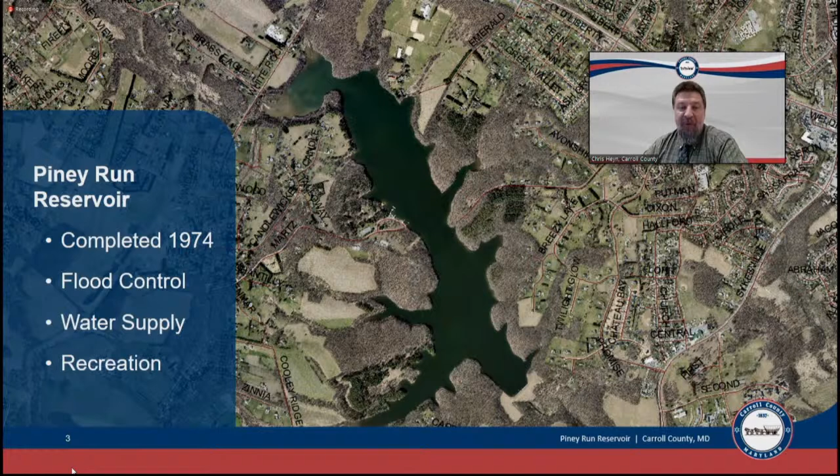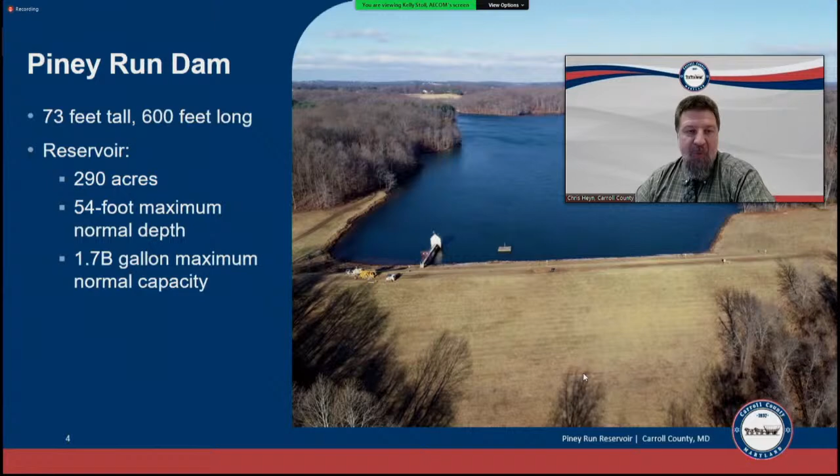So the reservoir itself is held back by Piney Run Dam. The dam is 73 feet tall and 600 feet long. It's the largest dam that is owned and operated by Carroll County. The reservoir behind it is approximately 290 acres of water, the maximum depth is 54 feet. I don't think you can really quite see it in the image, but there's a red buoy floating right next to the dam. That buoy is actually tethered to the lake drain, and that's the point of deepest water, where it's 54 feet deep. The overall capacity of the reservoir is about 1.7 billion gallons. Next slide, please.

So as we're talking about the dam and the reservoir, I wanted to talk about some of the key terminology so everybody is on the same page and knows exactly what it is that we're talking about. Obviously, the dam is the most important feature that we're talking about here. The picture in the upper left corner shows the dam looking along it with the reservoir off to the left. The permanent water level in the reservoir is maintained by the principal spillway, which is made up of a riser structure, a concrete structure pictured in the lower right corner. That concrete structure has openings on the side, and the elevation of those openings is what controls the water level in the reservoir. The water flows out through those openings, drops down to a pipe, a 3-foot diameter pipe that runs through the dam and out to Piney Run. So that's what we call the principal spillway.

Now on the left side of the screen, the auxiliary spillway, also sometimes referred to as the emergency spillway, is another way for water to exit the reservoir. We have stream flow constantly coming in. During a large storm event, the reservoir fills up more, and the principal spillway tries to control the amount of water going out. If the storm is greater than what the principal spillway can handle, water would go out the auxiliary spillway as a safety measure, allowing water to get around the dam without it going over the dam, which would be an issue.

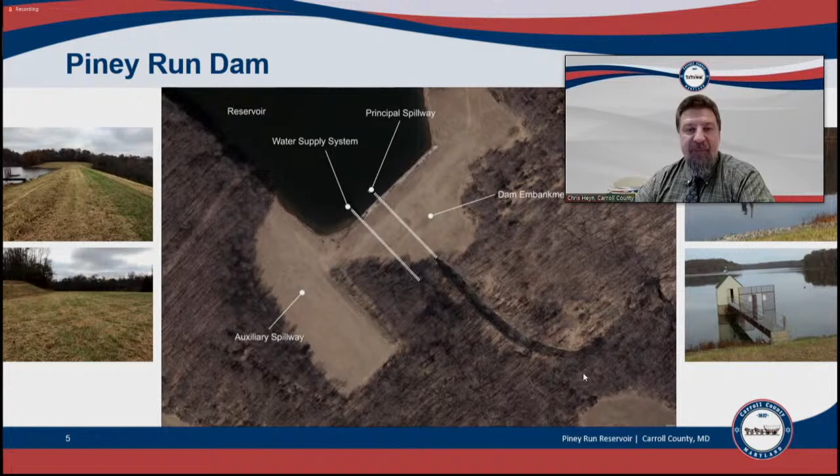This slide, just because I find it interesting, puts into reference the magnitude of the structures we're dealing with. The concrete structure on the right is from during construction, around 1973-74. The concrete structure in the foreground is the riser structure I talked about, and that's the top of it you see in the lower right. Water flows in at the top and drops down through the dam. The dam itself is not in this picture; it was constructed to the left of those concrete structures, and the reservoir is to the right. The structure in the background is the water supply structure.

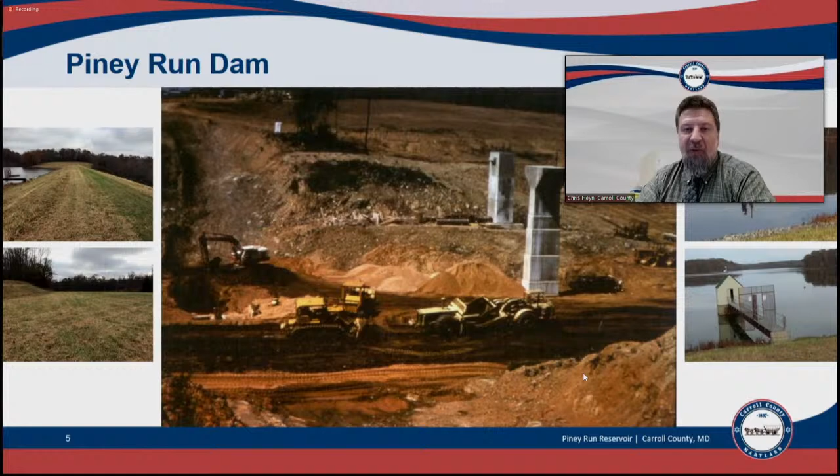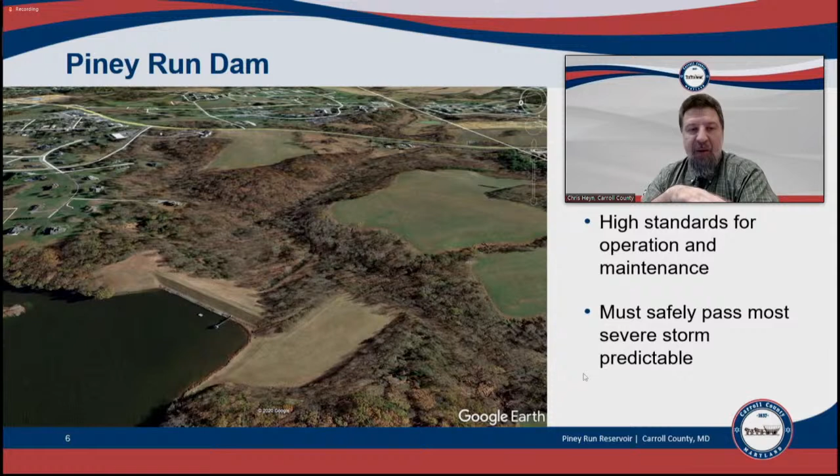Piney Run Dam is classified by MDE, Maryland Department of the Environment Dam Safety, as a high hazard dam. It's the only high hazard dam the county owns. The reason for this classification is that we have 54 feet of water stacked up behind the dam right now, and during a large storm that water level could rise all the way to the top of the dam or higher, meaning over 70 feet of water stacked up behind it.

If something catastrophic were to happen and the dam were to breach, releasing that wave of water, it would flow down the stream channel. In the background of the aerial photo you can see Maryland 32. That flood wave, starting off at over 70 feet tall, would still be 30 to 40 feet tall when it hits Maryland 32, which would be catastrophic. The flood wave would continue downstream, impacting over 240 properties and 40 other road crossings. So there is a real risk of catastrophic damage and loss of life if the dam were to fail.

To offset that risk, there are criteria we must follow. One is very high standards for operations and maintenance of the dam. The second is that the design of the dam and infrastructure must safely pass the most severe storm that's predictable.

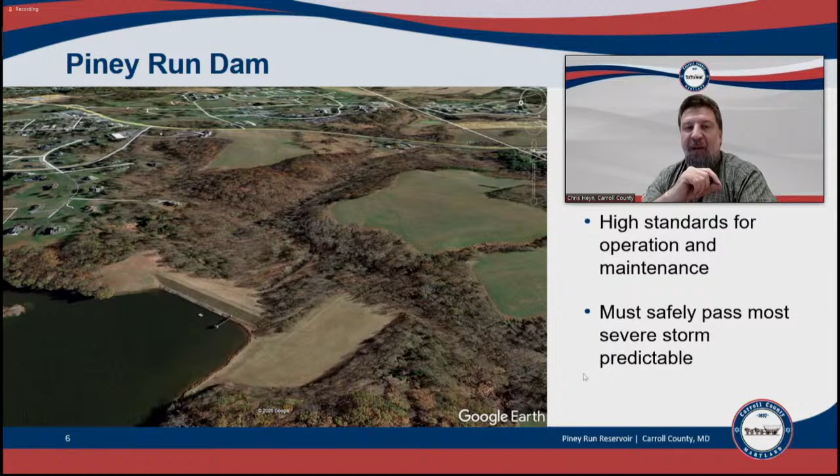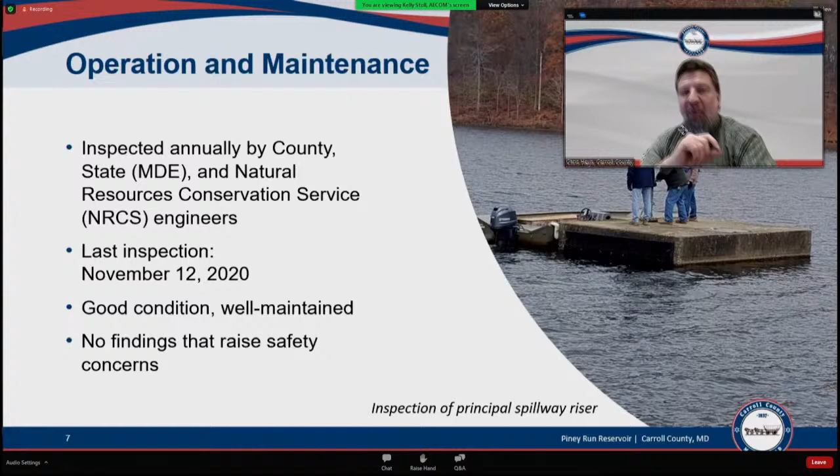One thing I want everyone listening to understand is that from an operation and maintenance perspective, there are no issues out at Piney Run Dam. We're not doing this project because of a structural or critical issue needing immediate attention. The dam is inspected every year by county staff, MDE state staff, and NRCS engineers to ensure it's in good condition and well maintained. We just performed our last inspection this past November and received the annual report from MDE with excellent marks across the board for maintenance and condition. This is not about addressing any deficiency in how the dam has been operated.

So the reason why we're doing this study is because of an MDE compliance question. One of the things we have to look at is whether the dam infrastructure and the spillway can safely pass that design storm, the worst possible imaginable storm. It's really a question of spillway capacity - is this spillway wide enough to handle the flow for that worst imaginable storm?

The other question relates to the erodibility of the spillway. If we have a storm large enough that water is going out that earthen spillway and it starts eroding, it could erode back and fail the dam and the reservoir.

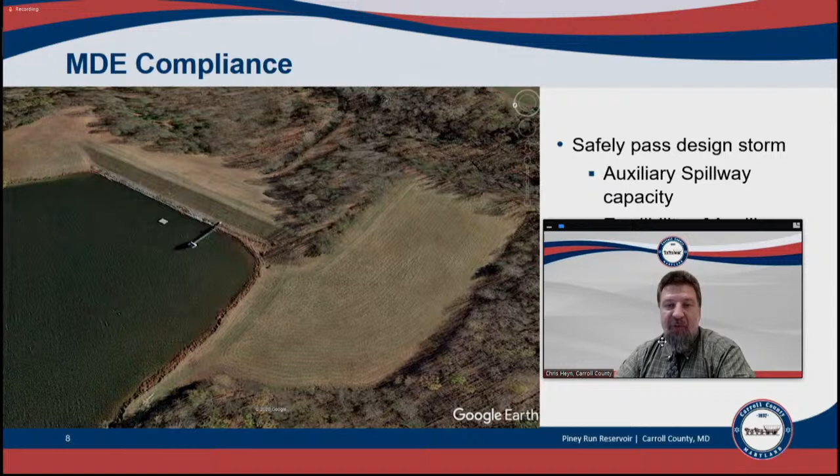MDE posed those two questions a couple of years ago, and they directed us to perform a study and determine if their concerns are valid or not. If they are valid, we're required to mitigate those issues by 2027. That was the impetus for all of this work.

So we hired AECOM, and their work is being funded out of a grant from NRCS, who originally constructed the dam. They've been working for the past just over a year on all of this analysis to determine whether those questions are valid, whether there are issues. Plus, they've done a comprehensive inspection of the dam, et cetera.

But I'm going to turn it over to Jeff Blass from AECOM, and he's going to talk about the work that they've done and the results that they've come up with.

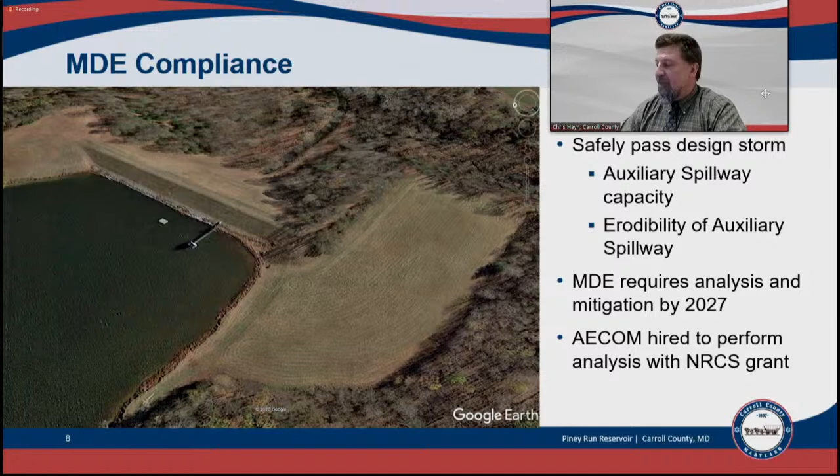I'm going to talk a little bit first about the work we did, and then go into the alternatives that came from it, and then hand it back to Chris to talk about some of the evaluations, pros and cons of those alternatives.

As Chris mentioned, AECOM was brought on to do a very detailed investigation of the dam, and then to look at MDE's concerns and determine if those concerns were valid, develop alternatives for addressing them, along with a look at water supply, which we've all heard about.

The initial investigations we did covered detailed inspections of the dam. In addition to the visual inspections done every year, we did a second visual inspection. We also inspected all of the conduits that run through the dam - the two that Chris mentioned, one for the principal spillway and one for the water supply structure. There are also several drain pipes that drain internal water inside the dam safely away, so we did camera inspections of those conduits in addition to the visual inspection of the dam and spillway.

We also performed a detailed hydrologic and hydraulic analysis of the watershed. This is basically a study of how much water will run off out of the watershed and end up in the reservoir, and then how the dam and reservoir handle that water during various storm events. And then what happens when it's passed through the dam and goes downstream, including under circumstances where we simulated catastrophic failure, so that we'd understand what the consequences would be downstream if a catastrophic failure were to occur.

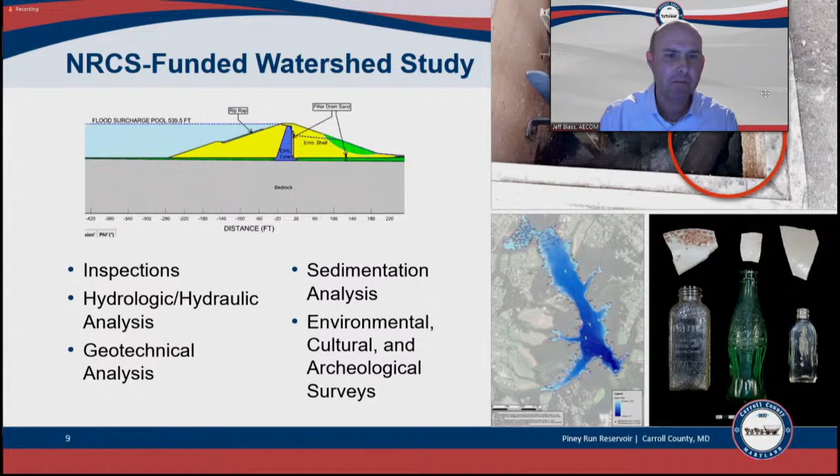So the first aspect that MDE wanted us to look at was the auxiliary spillway capacity. This deals with the spillway's ability to pass, as Chris mentioned, that worst case storm event.

We call that the probable maximum flood. This is a meteorological event that varies by region. For this particular region of the country, we're talking about 39 inches of rain in 72 hours. So over 3 feet in 3 days, a foot a day. You've got to think of it like that.

For people who were around in the mid-70s, this is over 2.5 times greater than what fell during Hurricane Eloise, and that's the largest storm the dam has seen. Most people know Hurricane Agnes occurred 3 years before, but that was before the dam was constructed. So a little over 2.5 times greater than Hurricane Eloise.

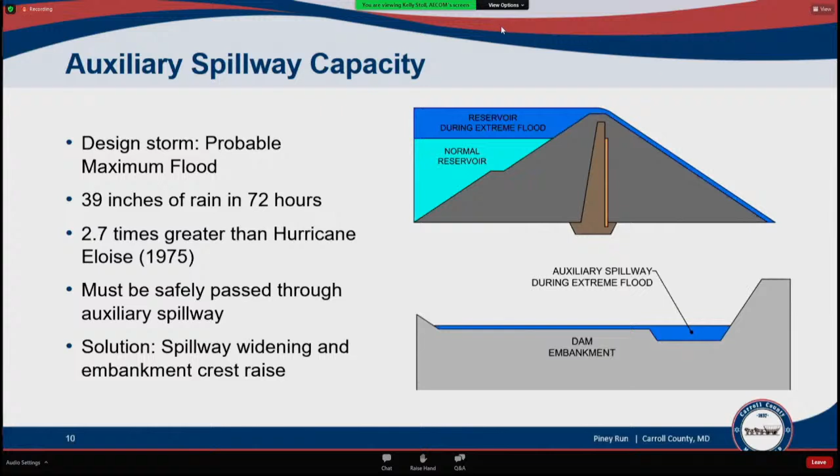That probable maximum flood needs to be safely passed through the auxiliary spillway, meaning it needs to pass without overtopping the dam. Right now, it doesn't do that. That was one of the findings of our hydrologic and hydraulic analysis: the dam does not have the spillway capacity to pass that required design event.

So we looked at different solutions for dealing with that. We looked at constructing a second spillway. We looked at just wholesale widening the first spillway until we could meet what we needed to. We looked at just raising the dam. What we came up with was the most efficient solution was a combination of widening the spillway and raising the dam a little bit.

Basically the idea is that we would take some of the soil from the right side of the spillway and widen that spillway out to create more capacity for flow. And then we would put that soil on top of the dam and raise the dam up, which also helps increase the capacity of the spillway to convey flow.

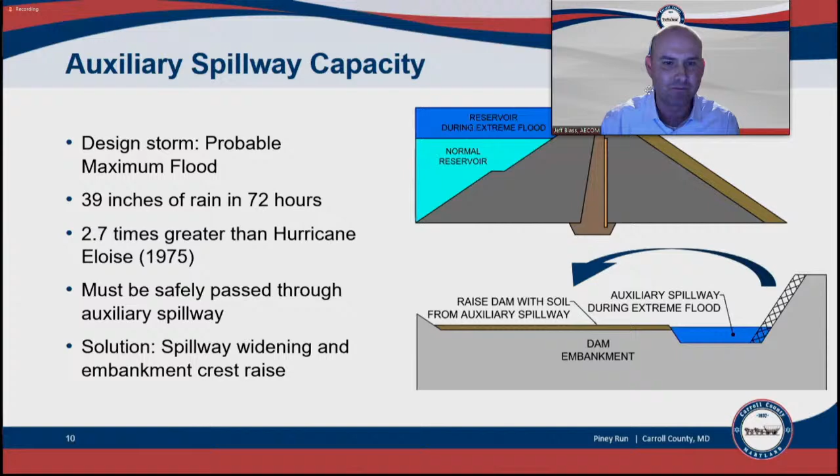The second aspect we needed to look at, from MDE at least, was the auxiliary spillway's potential for erodibility. Through our geotechnical analysis, when we drilled into the ground and took soil and rock samples, we found that the auxiliary spillway was actually constructed on a combination of soil and what we would refer to as highly weathered rock, meaning rock that's not competent, not sturdy and strong and massive or big. It's starting to break up.

It's starting to kind of turn into soil, so it can be pretty weak. And that doesn't have a lot of resistance to erosion, especially under the type of storm event we're talking about needing to design for.

The concern here is that with all that soil and highly weathered material in the spillway, when we got a big event and the spillway were to flow, we could start to have erosion that started at the downstream end of the spillway, which, if you're at the dam, you'll know is towards the woods. It would start down there and then work its way back up through the spillway, ultimately possibly ending in an uncontrolled release of the reservoir through the breached spillway.

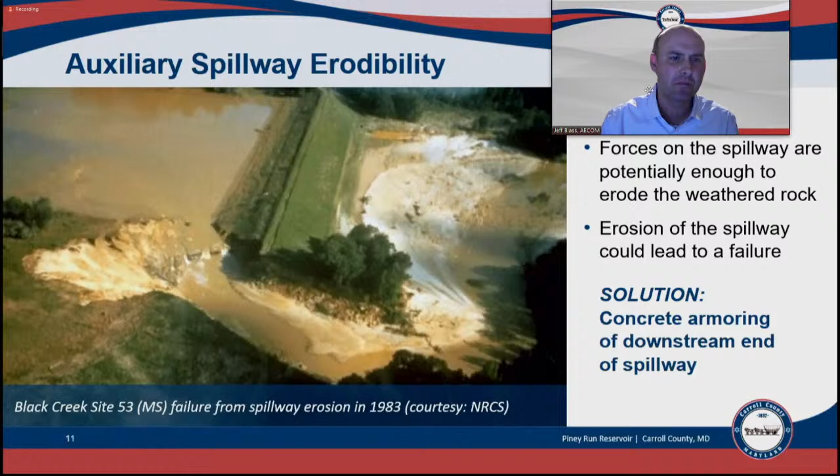From MDE's perspective, the deadline to deal with the MDE compliance component of this work—we talked about raising the dam and widening the spillway as a solution, and armoring the downstream end of the spillway—needs to be implemented by the end of 2027.

For that piece of work, the estimated costs are approximately $7.5 million, covering design, permitting, construction, and everything in between. The potential for NRCS participation is that they would fund 100% of the design, and then there's a 65-35 cost share with the county, where NRCS would pay for 65% of construction and the county would pay the remaining 35%.

So that means, in real dollars, a potential for a $5 million NRCS grant.

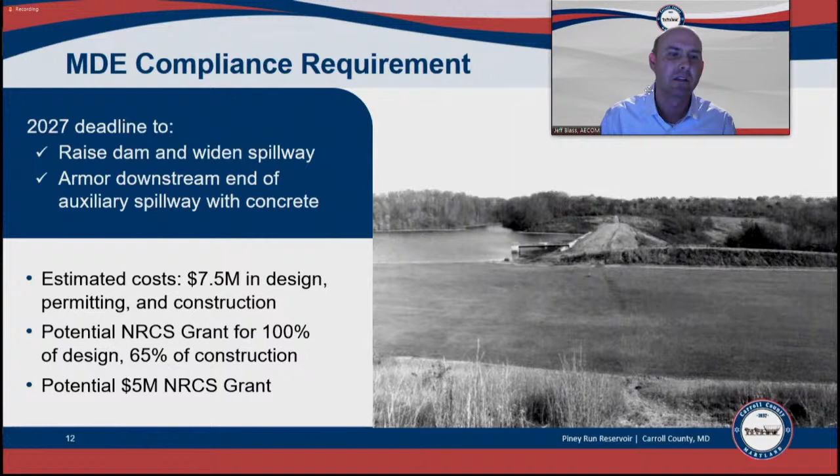Now I'll talk about the other aspect we were asked to look at, which was the potential for future water supply security. We looked at what has traditionally been engineered to determine the safe yield of the reservoir, which is basically an assessment of how much water can be withdrawn from the reservoir on a daily basis without causing it to drop below a minimum required pool elevation. Based on that, there's a certain amount of volume allocated for water supply—about 38% of the total reservoir volume all the way up to the top of the dam.

We looked at that against the sediment we found accumulated in the reservoir. In the course of our study, we found approximately 725 acre feet of sediment has accumulated in the reservoir. To put that into perspective, think of a football field that's 725 feet high—that's how much sediment has accumulated over the 45-year life of the reservoir.

Those of you who live or recreate up at the upper ends of the lake or in some of the coves have probably seen evidence of that in terms of very shallow water depths or even exposed sediment. So what that does is take away from the available volume of water to be used for recreation, water supply, et cetera.

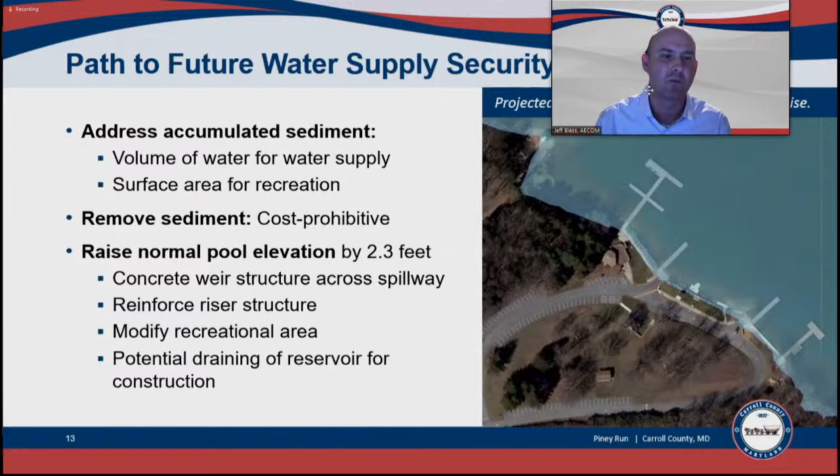And the last one is kind of getting back to that riser structure, because we'd have to reinforce it all the way top to bottom. At this planning stage, one of the ways we can do that safely is to drain the reservoir. There are other ways, and they have different costs associated with them, but one of the ways we were looking at is draining the reservoir for construction. Not construction of the whole job, but certainly for construction of these riser modifications, to make sure that it's done safely.

So what does this look like from a cost perspective? The total project costs, you're talking about an additional $8 million in design, permitting, and construction costs that could be funded by NRCS. So that would now make the total dollar value $15.5 million. NRCS would pick up 65% of that, so we're talking about $10 million. Plus there'd be an additional $5.5 million county investment that's not reimbursable. So a total of $21 million in the total project cost, with a potential for $10 million in NRCS grant funding.

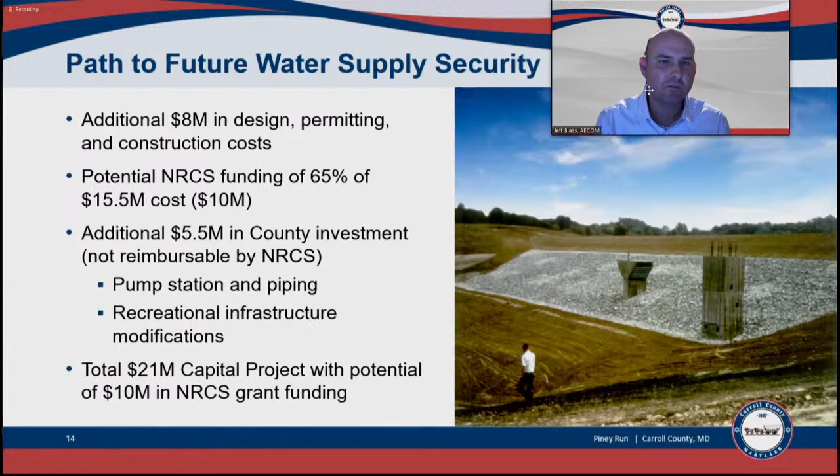So the first alternative we call alternative zero. And from a staff perspective, this is not a popular alternative, but it's one that we have to present to the county commissioners as it is an option. And that is to basically say we're not going to do anything. So it's the non-compliance option. The reward, the positive to that, is that there's basically no investment of capital and resources by the county, so the estimated budget is zero. The downside of this though, the risk, is that we're talking about a public safety issue.

We're talking about a compliance issue. Maryland Department of the Environment has the legal authority to enforce these requirements. And so MDE could basically then step in and perform the work, and then charge the county for the work that's performed on our property. So one way or another, these compliance issues need to be addressed. And if we go with the non-compliance route, then we would have no control over the costs. MDE would basically do whatever they felt was appropriate, including they could choose to remove the dam, because if you remove the dam, you remove the hazard. And that's not an alternative that anybody wants. We do not want the dam removed. So while this is an alternative that we have to present to the commissioners as an option for their consideration, we certainly do not recommend this alternative, but it's one to consider.